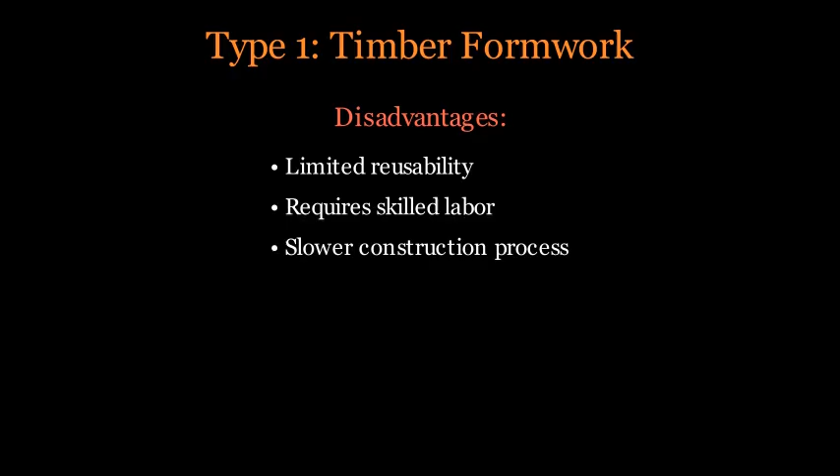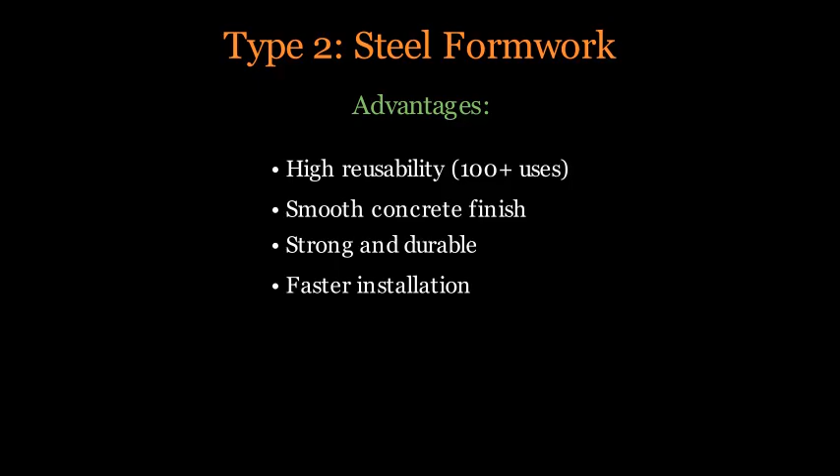Type 2. Steel formwork. Steel formwork consists of prefabricated steel panels and frames. Advantages include high reusability with over 100 uses, smooth concrete finish, durability, and faster installation. Disadvantages include heavy weight requiring machinery and rust susceptibility.

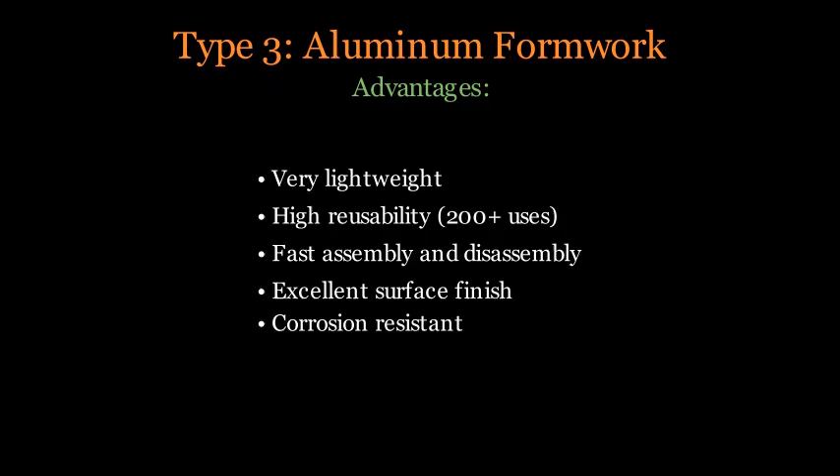Type 3. Aluminum formwork. Aluminum formwork is a modern, lightweight system made from aluminum alloy panels. Advantages include very lightweight nature, extremely high reusability with over 200 uses, fast assembly, and very high corrosion resistance. Disadvantages include limited design flexibility and the requirement to purchase complete systems.

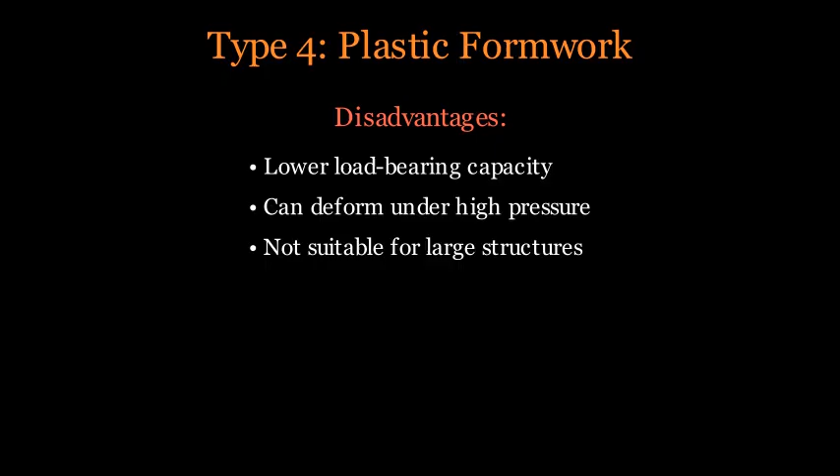Plastic formwork. Plastic formwork consists of interlocking modular panels made from durable plastic. Advantages include extremely lightweight construction, easy handling and assembly, and waterproof properties. Disadvantages include lower load-bearing capacity, potential deformation under pressure, and unsuitability for large structures.

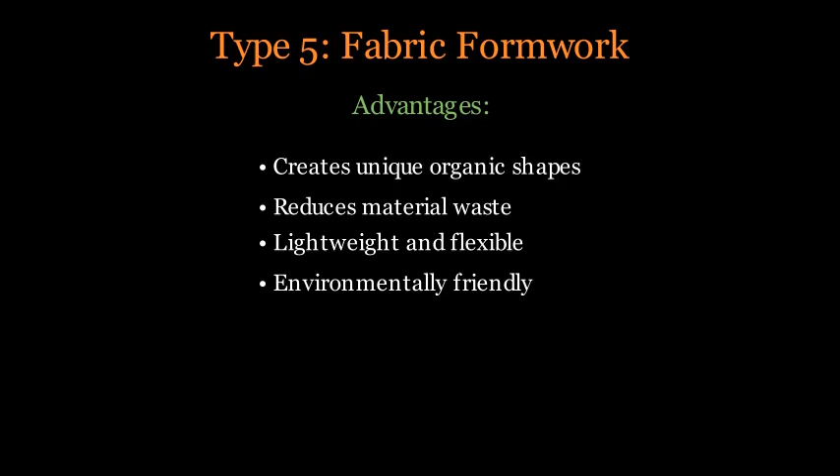Fabric formwork uses flexible fabric membranes to create unique architectural shapes. Advantages include creating unique organic shapes, reducing material waste, and lightweight flexibility. Disadvantages include specialized design, limited structural applications, and not being widely adopted yet.

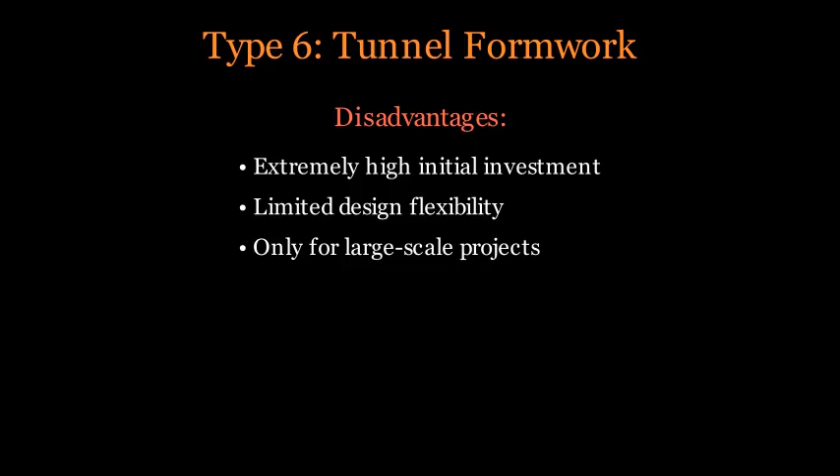Tunnel formwork casts walls and slabs simultaneously in a single operation. Advantages include very fast construction cycles, high quality and accuracy, and simultaneous wall and slab casting. Disadvantages include extremely high initial investment, labor requirements, limited design flexibility, and suitability only for large-scale projects.

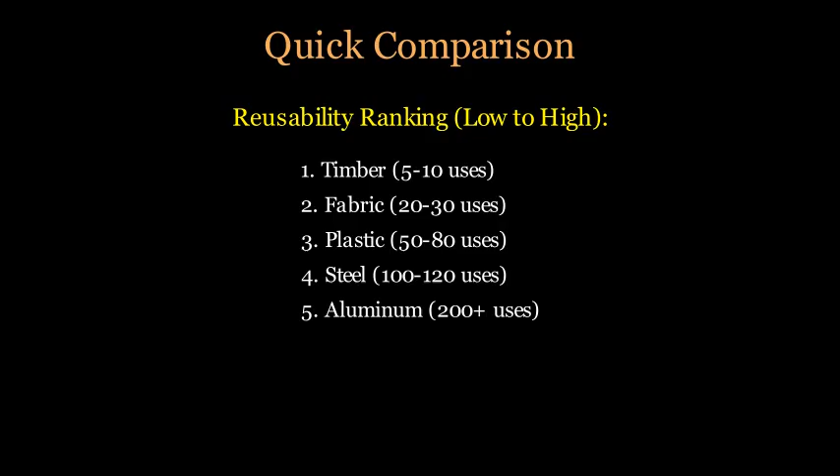In terms of cost from low to high: timber, plastic, steel, aluminum, and tunnel formwork. For reusability from low to high: timber with 5 to 10 uses, fabric with 20 to 30, plastic with 50 to 80, steel with 100 to 120, and aluminum with over 200 uses.

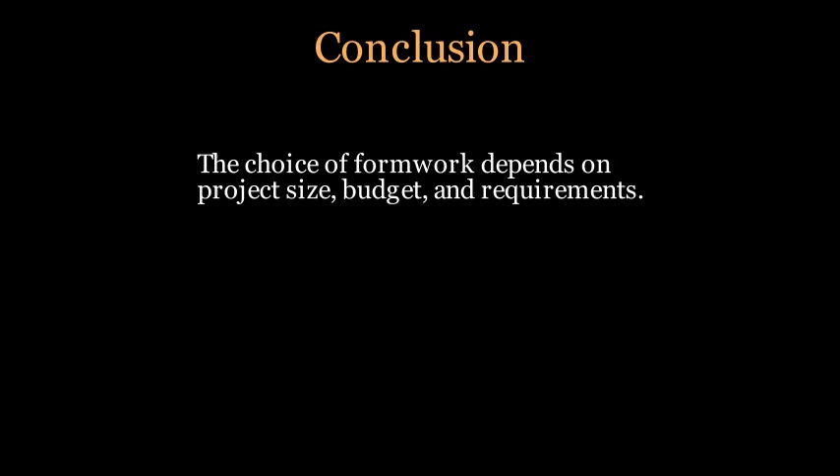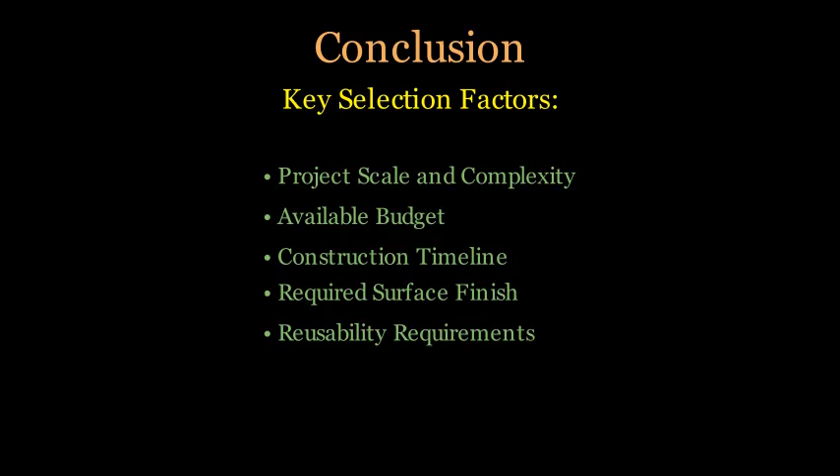The choice of formwork depends on project size, budget, and requirements. Each type offers unique advantages for specific construction scenarios. Key selection factors include project scale and complexity, available budget, construction timeline, required surface finish, and reusability requirements.